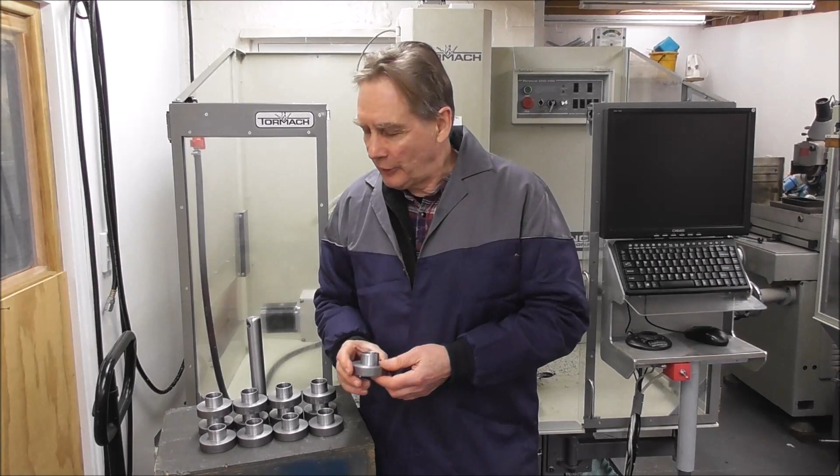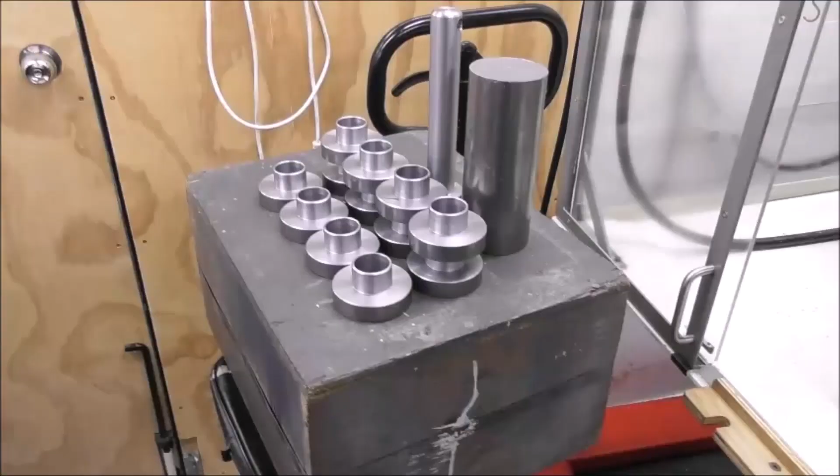Been carrying on with the series SlantPro Set Up and Run, machining up some steel parts. This will be part 2, getting into setting up the tooling and the offsets and doing the conversational programming. So I'll run the part now, the end result, just quickly, sped up or with bits clipped out, so you can see where we're heading with this SlantPro machining job.

So first off, I set all my X or diameter settings. That's tip of the tool for the turret, and if you've got drills, the center line of the drills. Set all the X's, don't worry about the Z's. Then put your work in, take a skim cut and set the first Z. In this case, I'm using tool number 2.

Next, I'll typically set up the conversational first program and do the facing cut and machine the part to its finished length, and then I can set all the tool Z's off that finished length at Z0. So just looking quickly at that, here's your conversational. You're on your facing page. We're setting it pretty conservatively.

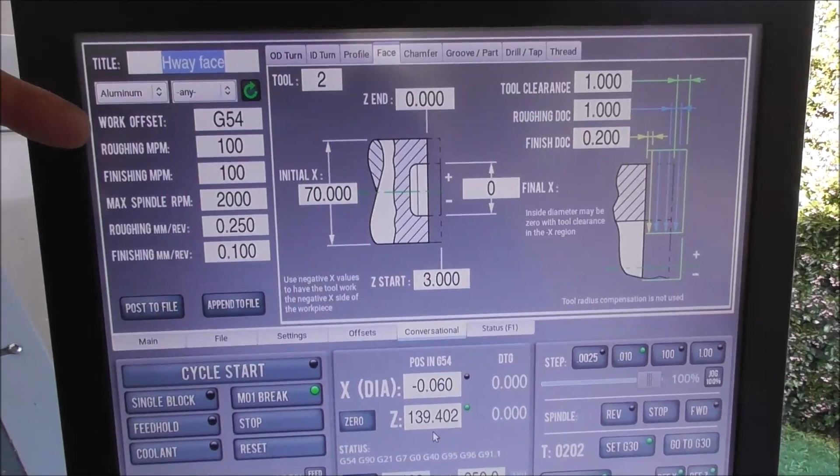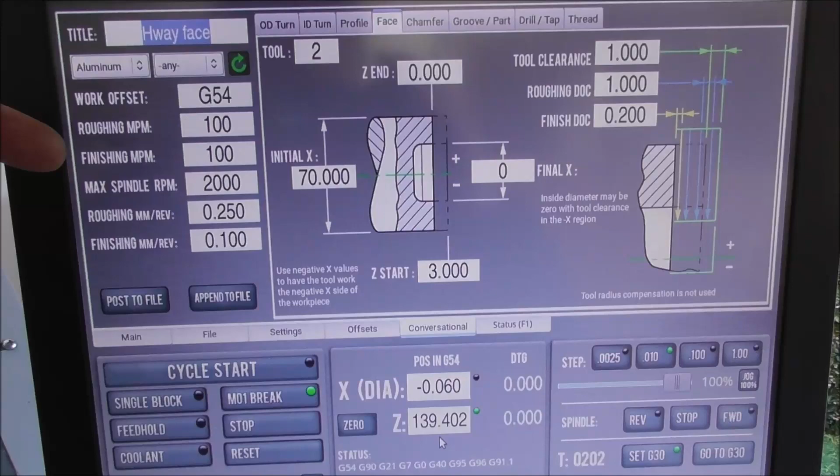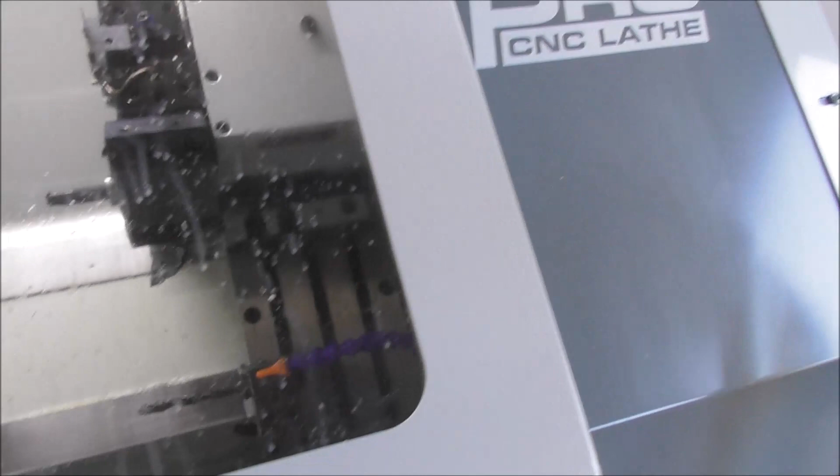You can't set optimum feeds and speeds on a light machine like this. You have to think about what the machine has got the power and the torque to handle, and how you're going to get your chip breaking to work efficiently, or at least chip curling, so that it'll run automatically and you can leave the machine unattended. Post that to file and run that program. Let's just do that now. Okay.

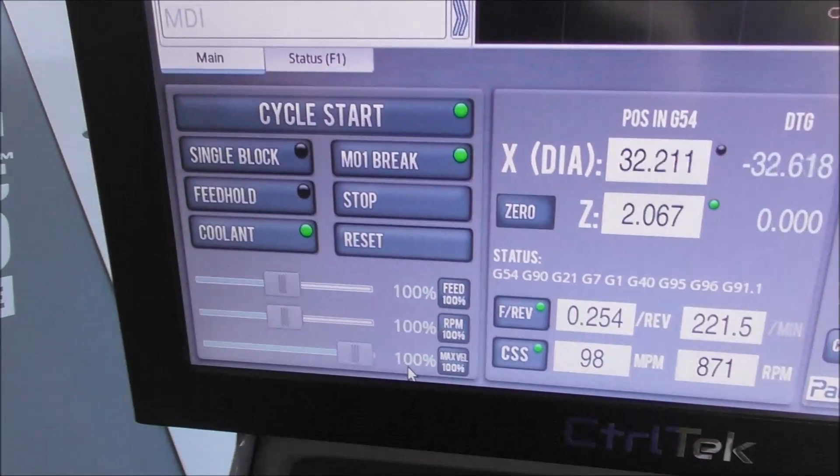So I've just run the part, but I'll just run it again to get the idea. Obviously you have your maximum velocity sliders down very slow the first time, so that you're checking for tool clearances and that you haven't made a mistake. So we're doing 2 fairly rough facing passes here, 1mm depth of cut each time.

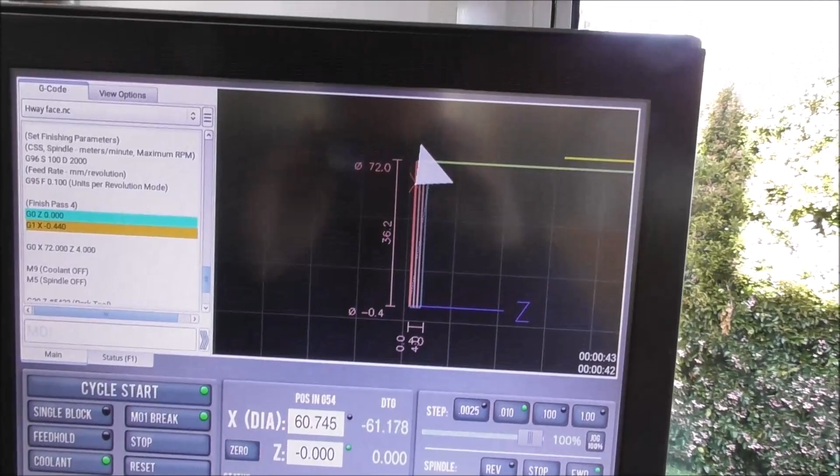This is the final roughing facing pass, and then finally the finish one. I won't bore you with that. Quite a slow pass, just to give a nice finish on the end. There's the bush there, a pretty basic part.

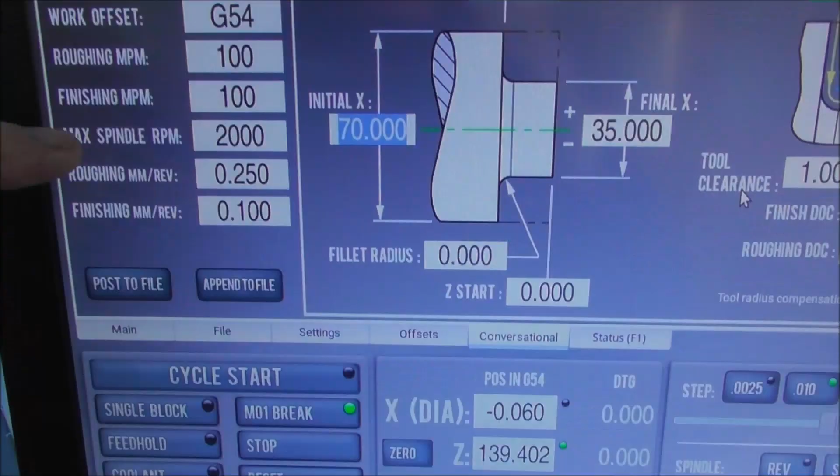So now I'm going to conversationally program the OD, outside diameter turning, and this is lovely, this software, isn't it? So quick and easy to use. So we're just calling it OD, or the thickness of the chip, if you like, a 0.25 or 10 thou, and a finishing of 0.1 or 4 thou. The depth of cut here is 1mm. That's 2mm on the diameter.

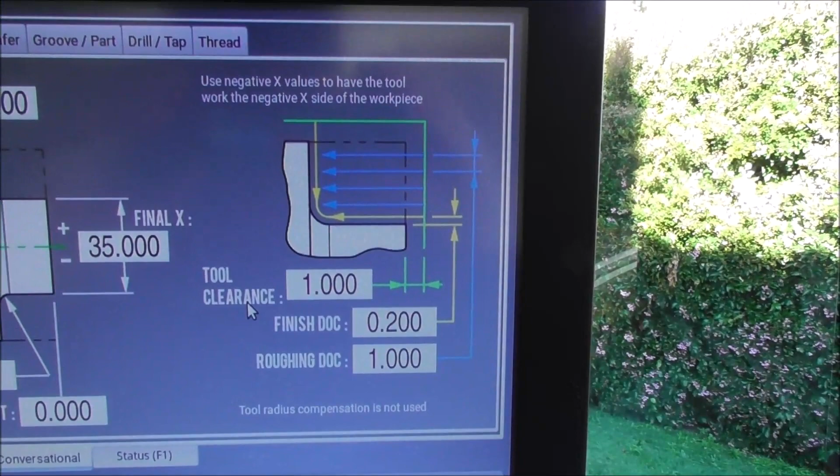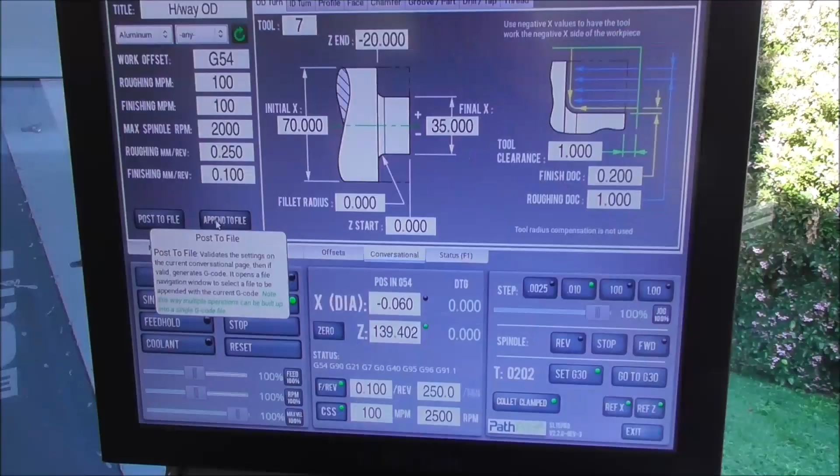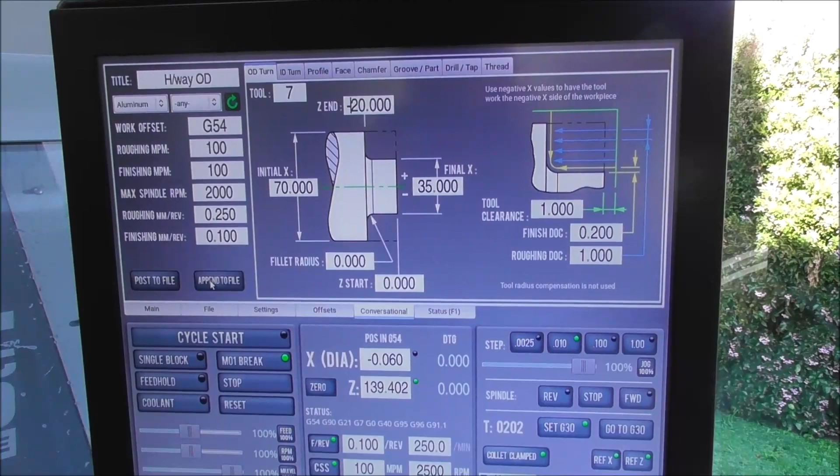I know the lathe can handle that, so I'm not going to push it. I don't want to be 99% at stalling point. I want to be able to go away and do something else. And when we've entered in the values, we can post it to a file, so it's just a one-off file to run that file separately, and if that's okay, then we can append it to the first file, so that we're building up a group of files or codes.

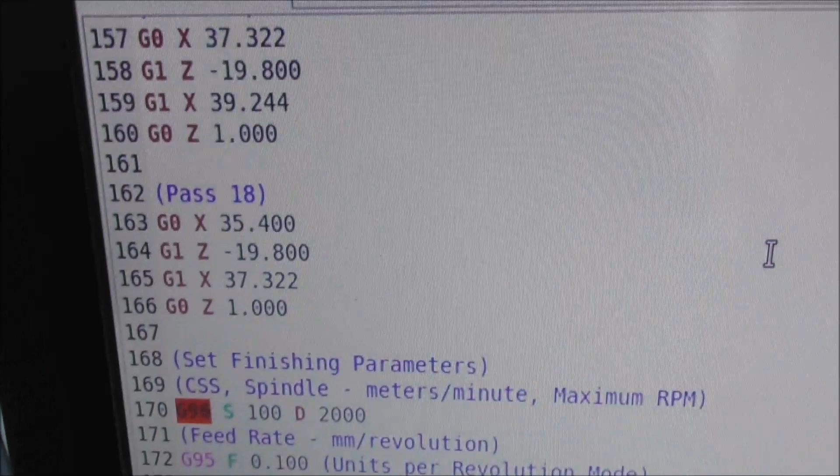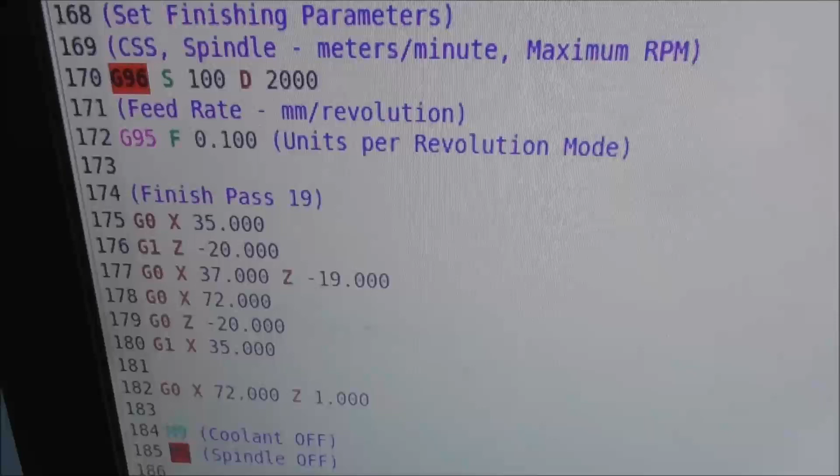I don't like the way the conversational does the finish pass. The final diameter is 35 by 20 deep, and there's the last roughing pass there, 35.4 by 19.8 deep. That's fine, but look at the finish pass. It goes to 35 by 20 deep. So that's the full width of the tool plunging into 20mm. That would probably stall the spindle, and I don't know why they insist on leaving that in the software.

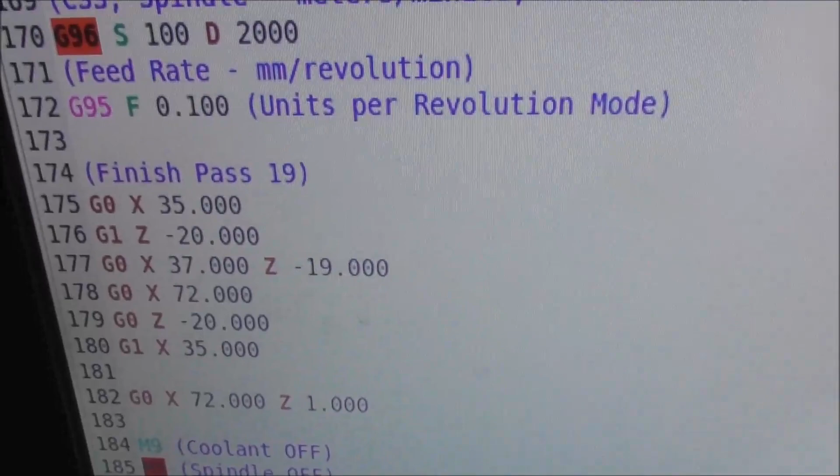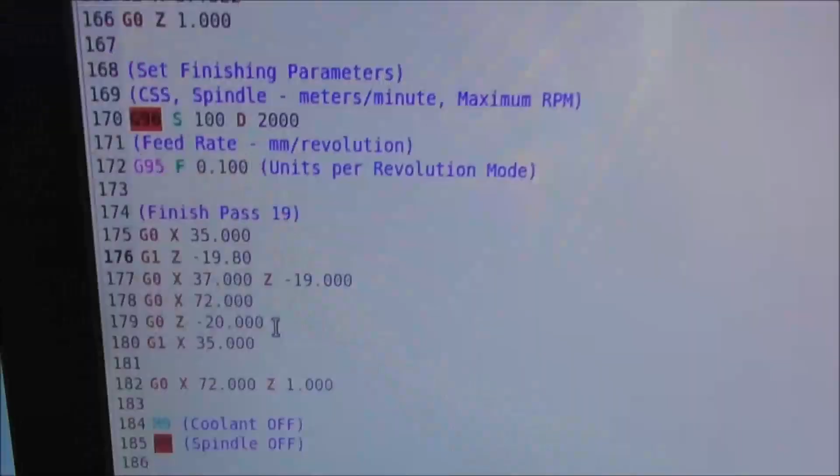You shouldn't do that. You should never cut full width of the tool. That works fine if you've got a very steep rake tool, like a profiling tool, but it's not suitable for a roughing tool, and so I need to edit that. So here I've changed the finish pass Z depth back to 19.8, not minus 20.

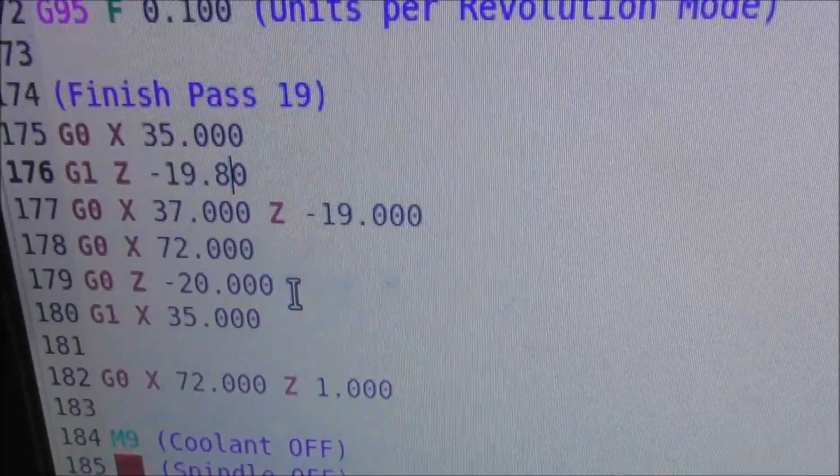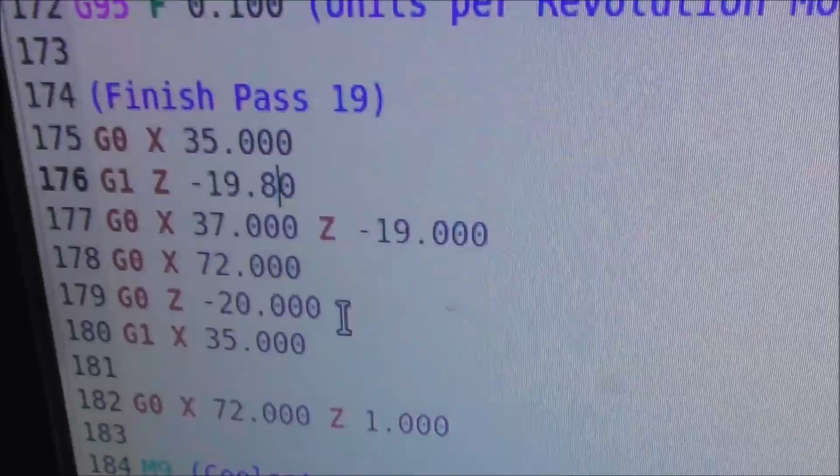Then it comes out to the outside diameter, sets it in at 20 millimeters, and then does a facing pass down to the 35. That is a much more conventional and safe way to cut that final finishing pass with that shape of tool, with a roughing tool.

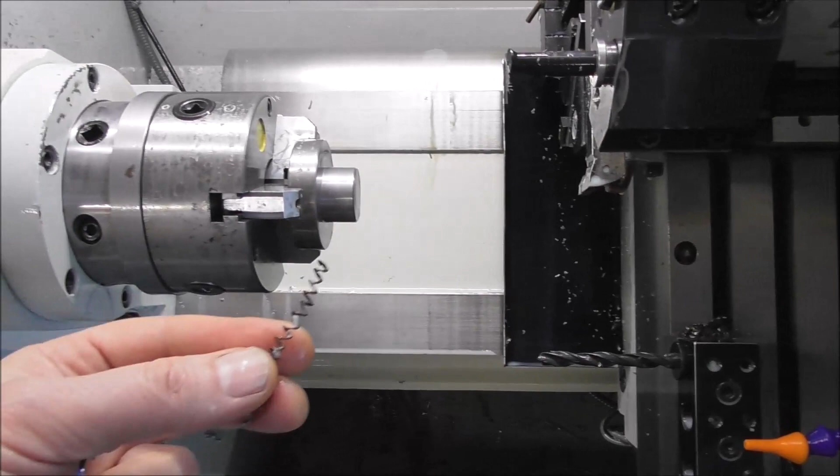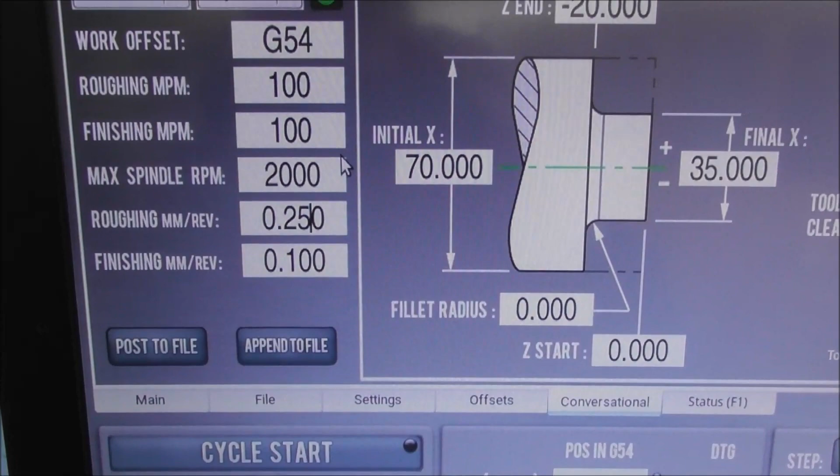While I'm on the subject of chip breaking and depth of cut and feed rate, you want the chips to come out like that, obviously, with a decent curl on them and not too long. You don't want them coming out like that. So the roughing millimeters per revolution is critical. This curly chip was 0.2 millimeters a revolution. That's 8 thou, and this curly chip here was 0.25.

That's 10 thou. So you need a fairly coarse feed, a fairly deep cut per revolution in order to get chip breaking. But if I went any higher, I might stall the spindle, so there's a narrow window there where you need to set it just right. You need it to run automatically with good chip breaking so you can do something else.

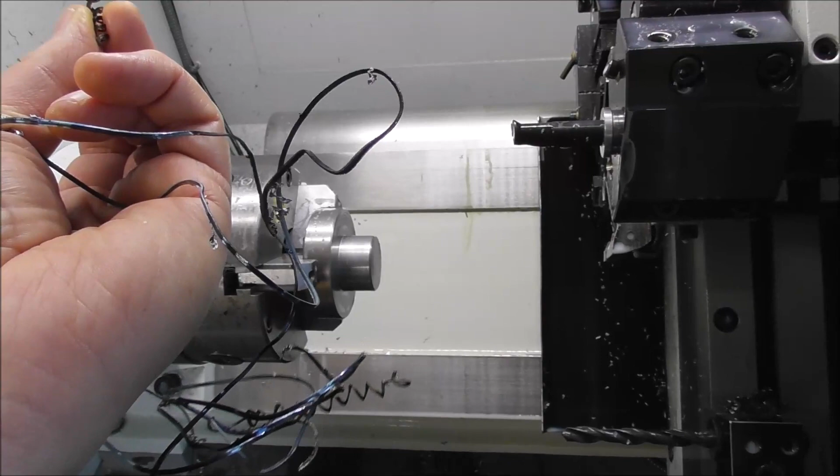You don't want to have this sort of swarf. Not only that, but it fills up a huge amount of volume. You need massive big bins. I mean, in no time your swarf bin will be full of springs, wiry springs, if you don't set that right. So there we are, that's the OD turned and chamfered.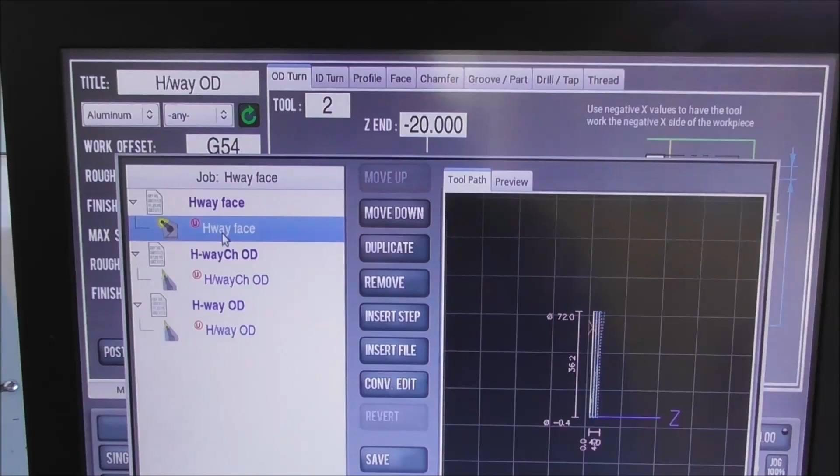Most of you will be familiar with the conversational, so I won't go into it in too much long-winded detail, but you open it up in conversational file edit or conv edit, and then those one-off codes that you've produced, you just keep inserting them. So if I insert a file here, I'm going to put in the second OD chamfer, and there it is there.

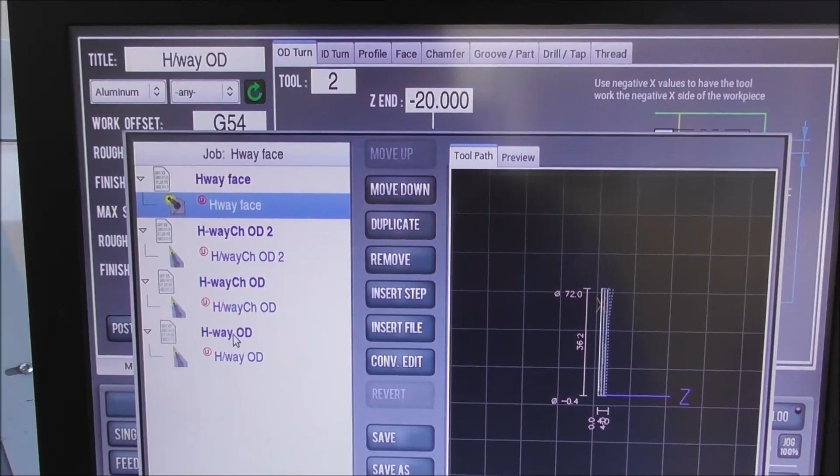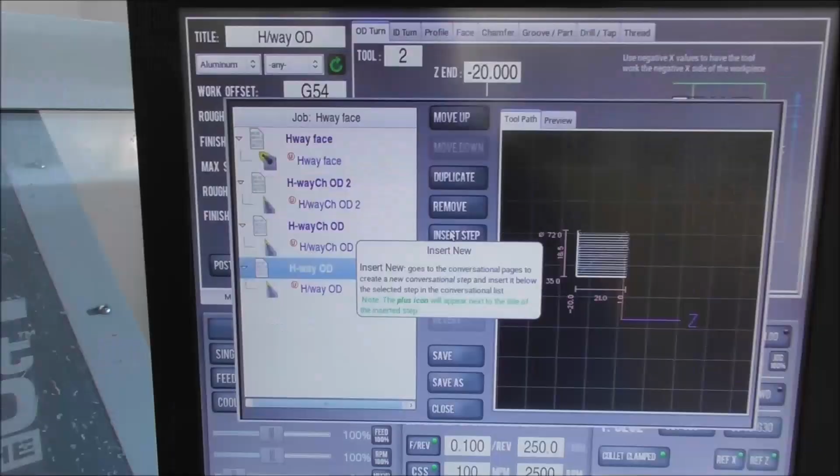So we've got face, OD, and OD chamfer 2. They're a little bit out of order because I'm talking and clicking at the same time, but you can adjust the order by moving them up and down, and I'll just do that now. So you can see here I've got the chamfers coming in before the turn. That would be a nasty crunch up, wouldn't it? So have a look at it here. I can just move up.

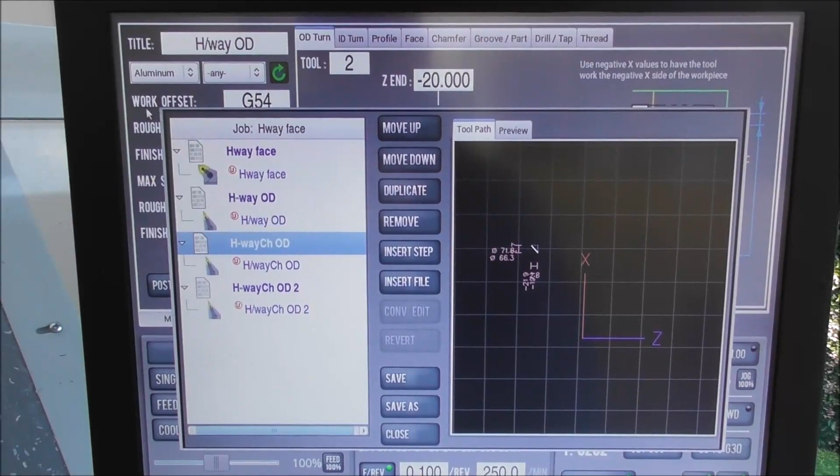So now I've got face, OD, OD chamfer 2 and OD chamfer. So it'd be nice if that one was before the other one, so I'll move it up. So you can adjust the order like that. Face, OD, OD chamfer and OD chamfer 2. And then you can save as, find a file name for it, and so on.

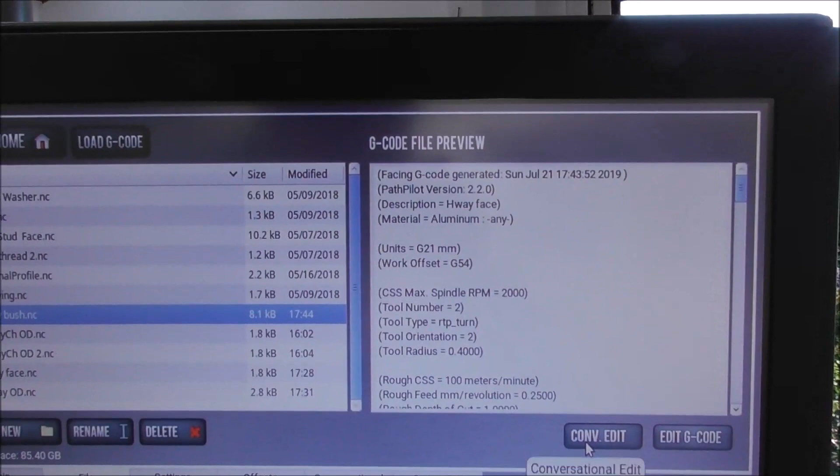I'm having a bad hair day today, you know, on those days when you've only got half a brain, but it's probably good to do a video like this sometimes because you can still do CNC machining with half a brain. It's just a bit scary.

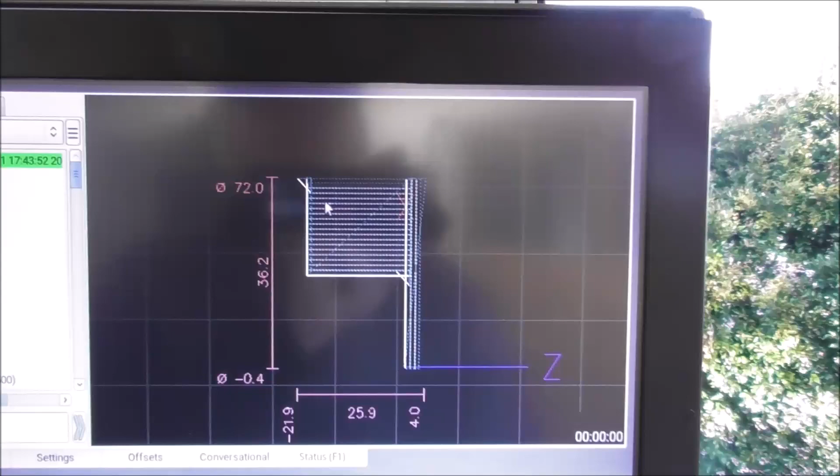So the correct button for that editing is conv edit. I suppose that means conversational edit, and it's saved. We've got it saved here to this file, and you can see all of those different little short bits of code are all put together now under Bush. Once you've got an end machine, you can set all of your Z tool offsets to that end.

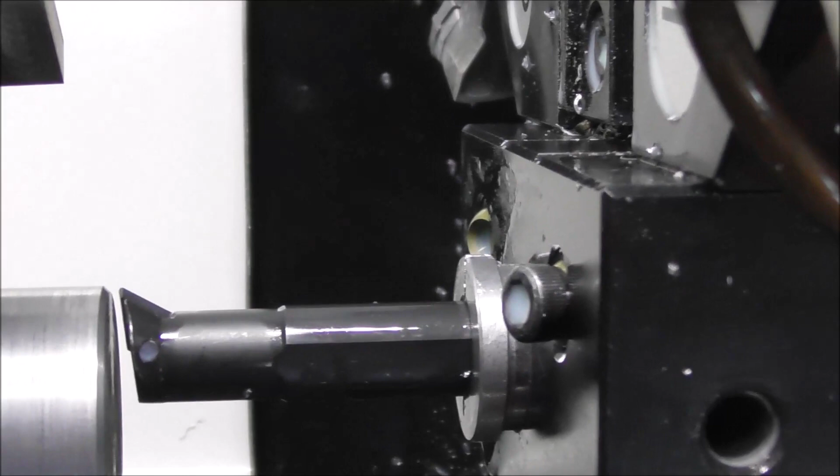Here's a trick for setting your X or your diameter for a boring bar. See, there's your boring bar there. You can put a straight edge like a parallel over there and then just tip it round, if I can show that, until you get it to the closest point to the tip, and then just index out on the X until it's just touching. You know that measured diameter is 35 millimeters, and you can set it there through this tool offset setting DRO.

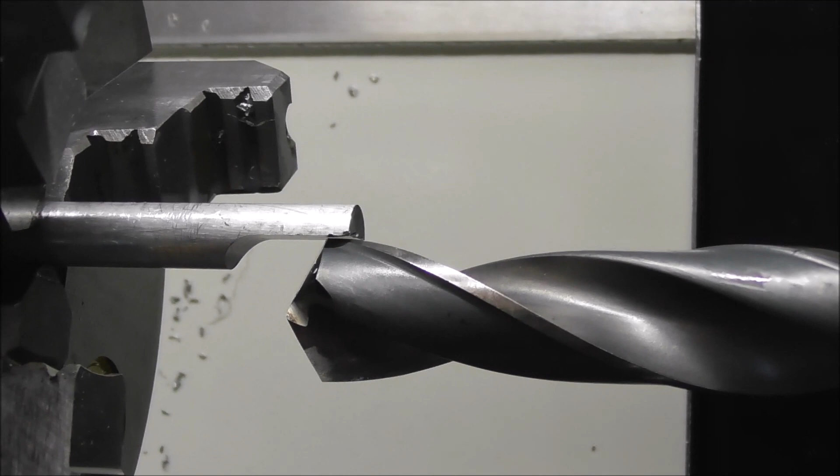So you can set your drill X position this way with your half round piece of aluminium, that's the center line, touch it up on the flute of the drill of a known diameter and enter that diameter. So we have a 17 millimeter drill there. So we've set our X there at 17.

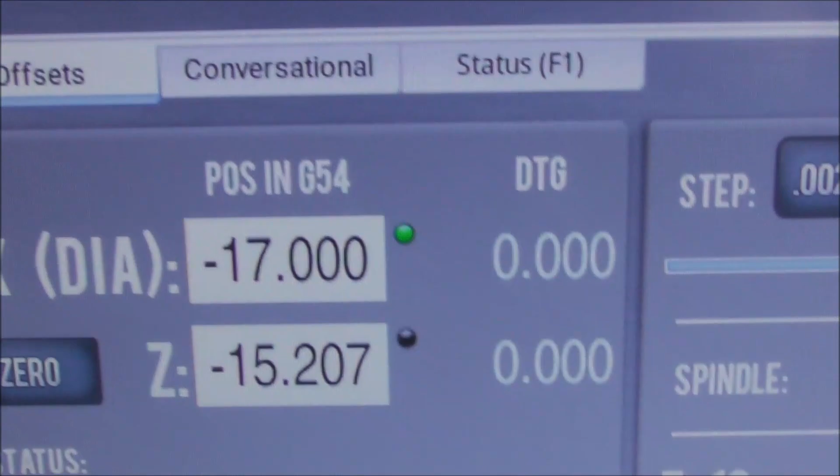These parts are being made out of commercial quality mild steel, you know, that grade that's suitable for welding, a very low carbon mild steel, and it's not very nice to machine. It's teary and sticky, and so I thought I'd try out this high clearance boring bar tip. I've never really liked these because they're so fragile and weak, but it's working really well. It gives you more clearance in the bore, and when you're CNC boring, it's quite a difficult situation.

When you're doing it in a manual lathe, you can manually back out the tool and flick out the chips with a wire hook or a brush, but you want the CNC to run automatically, so you've got to have your settings optimal. It's got to run smoothly and cleanly and not be jamming up with chips, so that high clearance on the shank diameter is a good feature to have, and it's the first part and it's gone really well. Perhaps this will explain it better.

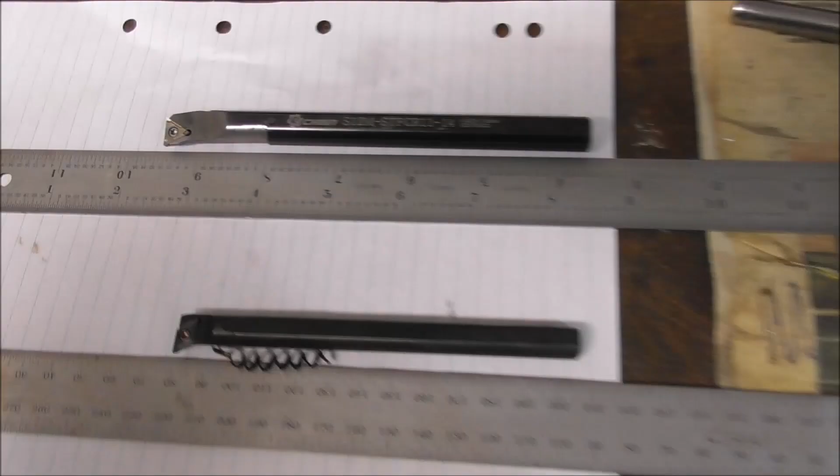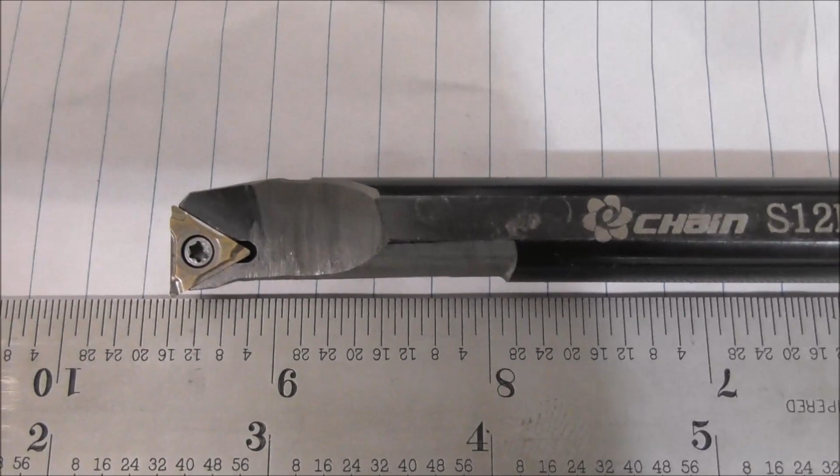What I mean by these high clearance profiling cutters is that you get a lot more clearance between the shank of the tool and the bore, and that's really important for automatic running, unattended running. Because a conventional boring bar is much stronger and can take bigger cuts, but you can easily get the swarf, the chips jammed up in the bore, and on a manual lathe you have to back off and clear it out and flick out the swarf and so on. But you don't want that in a CNC lathe.

You want it to run unattended, and so I think it's worth having a weaker tool that takes smaller cuts, but you've got more clearance. No, that works really well. I'm glad I tried it, because production boring the ID in non-free machining steel is quite difficult to get it to run automatically so you can let it go. So the settings for that is a 0.8 depth of cut, a 0.15 feed, that's about 6 thou, and 100 meters per minute.

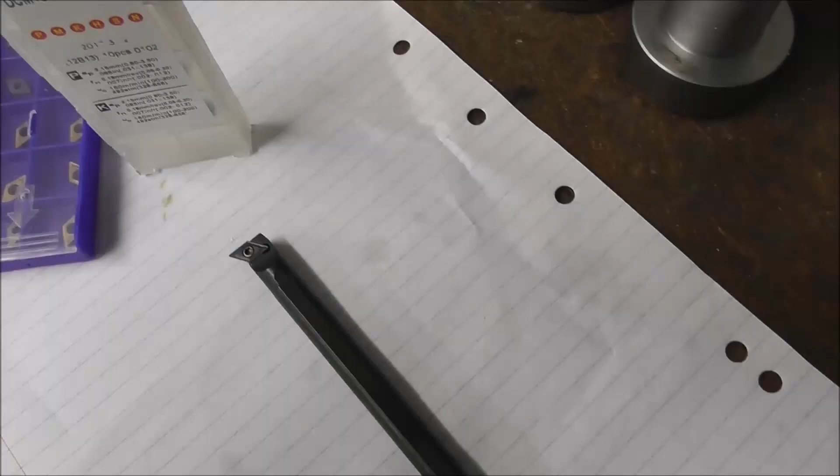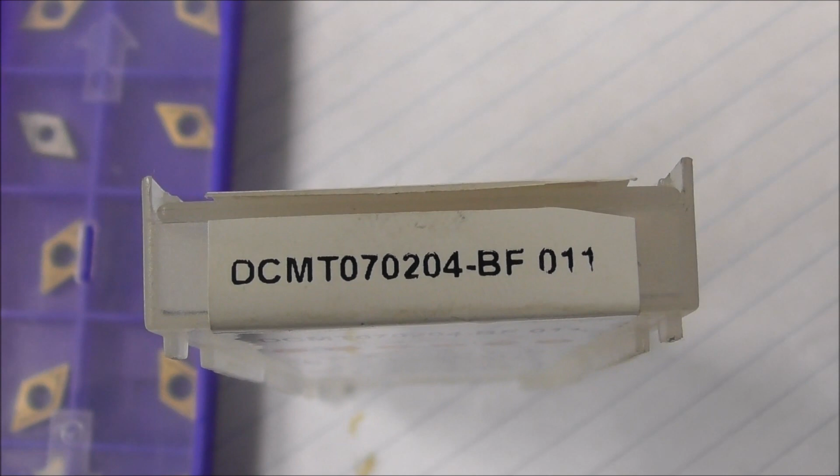Here's a view of that high clearance or profiling geometry boring bar that's inserted in a 12mm holder. There's the tips there, DCMT, and I've just been getting these cheap Chinese copies. I sort of feel a bit guilty doing it, but I wanted to try the idea out without spending big money on Sandvik or Iscar, and they seem to be holding up quite well. So it's certainly a low cost option to get you started anyway.